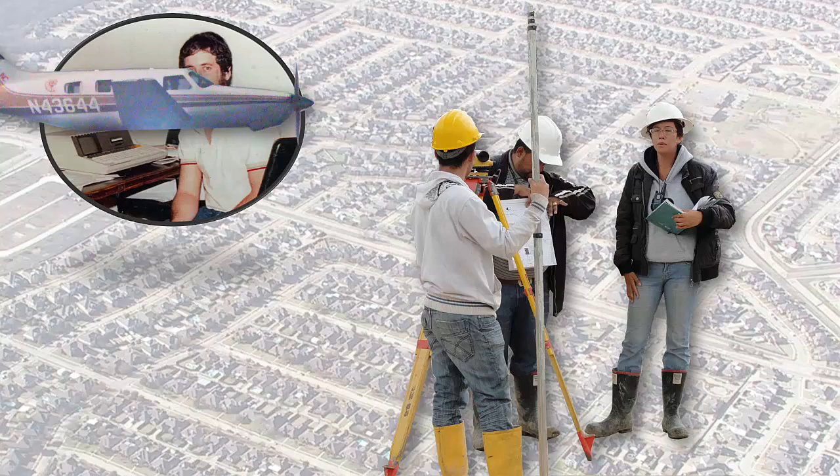Since the late 1970s, we developed software for the civil engineering and land development industry responsible for new growth and redevelopment. As we flew around the nation selling and servicing thousands of consulting firms, we could witness the sprawling subdivisions which were designed by CAD and our technology.

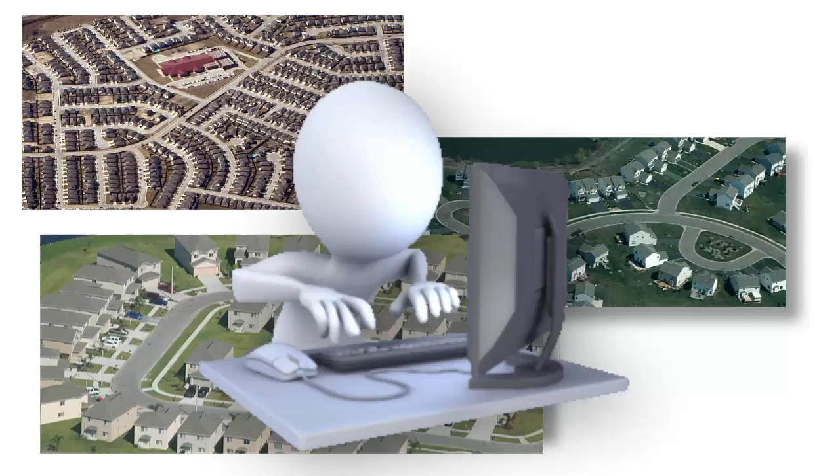It became obvious that a disturbing trend was happening. The pattern of development had gotten worse, not better, because of the repetitive, mindless software functions that replaced careful thought required for time-consuming, manual drafting of a neighborhood design. What would have taken weeks or months could now be done in just a few minutes.

These subdivisions were not disposable products, but unsustainable projects that would negatively affect the economics and living standards for a massive number of people for possibly centuries.

Over a quarter century ago, we formed a spin-off think tank to use the technology we pioneered to discover ways to solve problems of growth without sacrificing the values in space.

Experimentation led to our first discovery we coined coving, which separated the rigid relationship between home front and curb and instead developed a meandering space in the front yard where each home was set to create a curved pattern different than the alignment of the street.

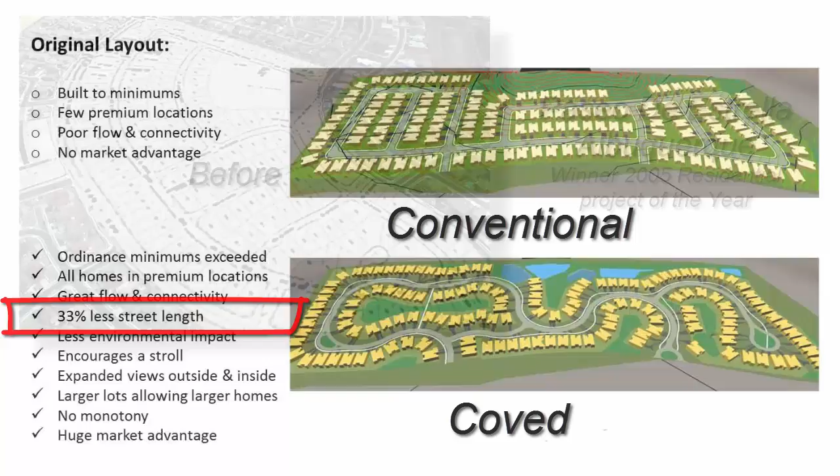By stretching the front setback line and developing flowing street patterns, we could significantly reduce the length of a street by a demonstrated average of 33% without a density loss using the very same regulatory minimums of standard suburban design.

Instead of walking to a park 5 or 10 minutes away, the street took on a park-like setting, enhancing curb appeal and related home values, as well as significantly increasing average lot size.

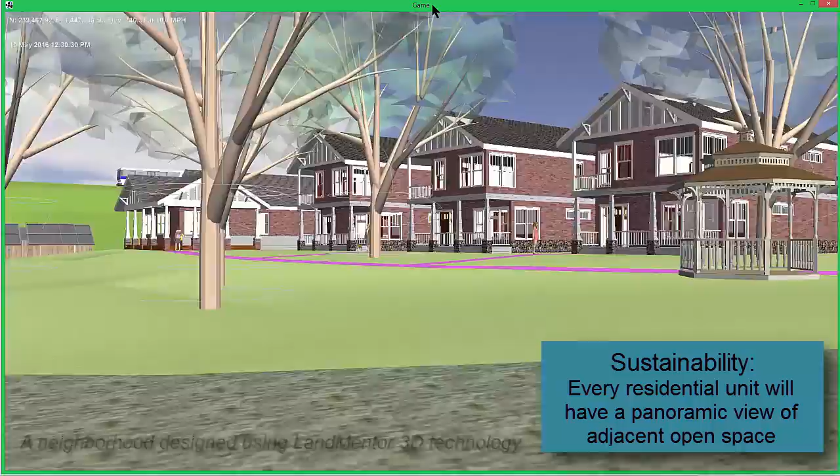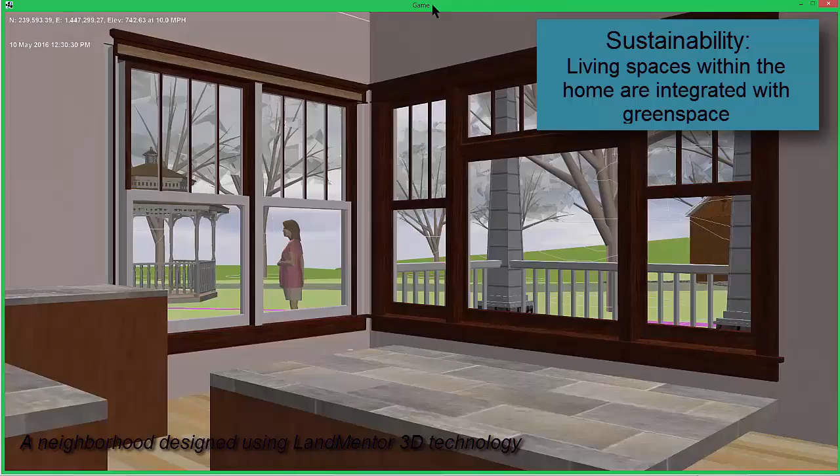By the late 1990s, we introduced the Bay Home, which was the first merging of architecture and planning, where living spaces within the home blended with open spaces around it by creating panoramic views in a village-like setting.

Unlike coving, where homes are set as an art form, Bay homes are carefully staggered to provide a panoramic view and intended as a more viable alternative to townhomes, twin homes, and the rigid new urbanist patterns.

We then looked at the zoning patterns. The transitional patterns common to the suburbs place the highest density and cheapest products along arterial streets and other bad locations, resulting in lower overall value.

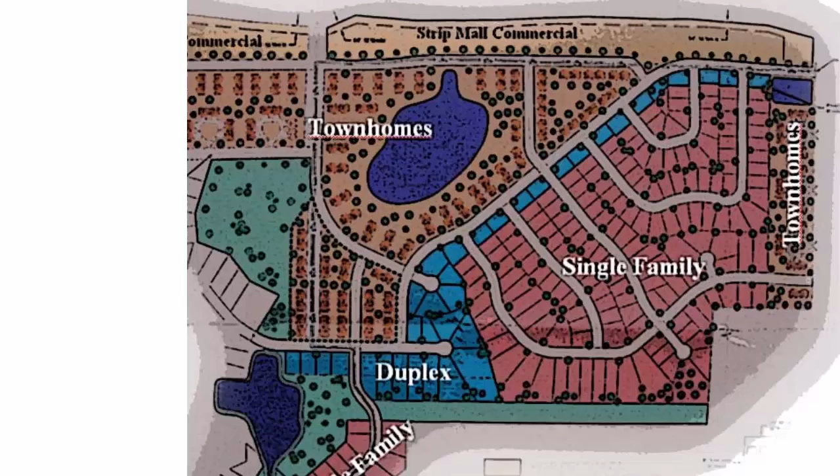Somehow placing a cheap product up front and the most population in the worst places seemed normal. We began to reverse this tradition by placing better products in the perimeters and place everyone, regardless of social strata, in better locations. We coined this new land use relationship CND, or Connective Neighborhood Design.

We also standardized on wider, meandering walks set in easements as they extend beyond the right-of-way. This attention to geometric detail would not just beautify any neighborhood, but has significant safety advantages when pedestrians intermix with vehicular traffic.

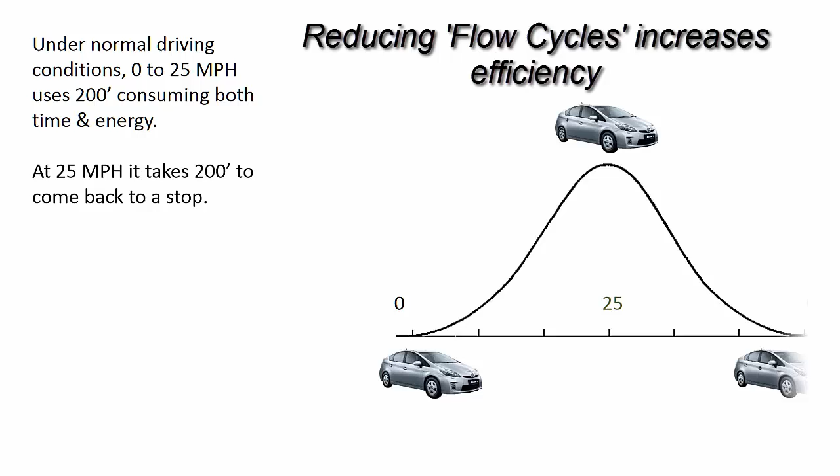As we continued research in how vehicular and pedestrian systems could be improved, we developed a science in neighborhood street patterns that minimize the number of accelerate, stop situations, or flow cycles to reduce both time and energy in transit. For pedestrians, we developed a systematic approach to design, the main trails being the first step in a process to assure all growth was truly walkable.

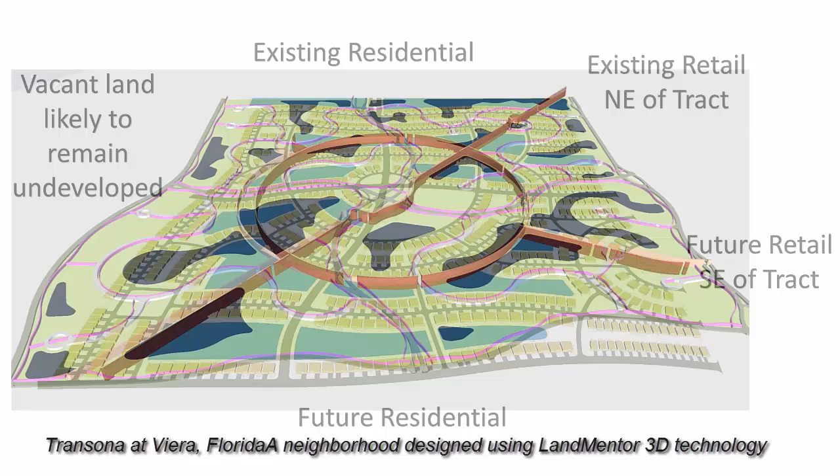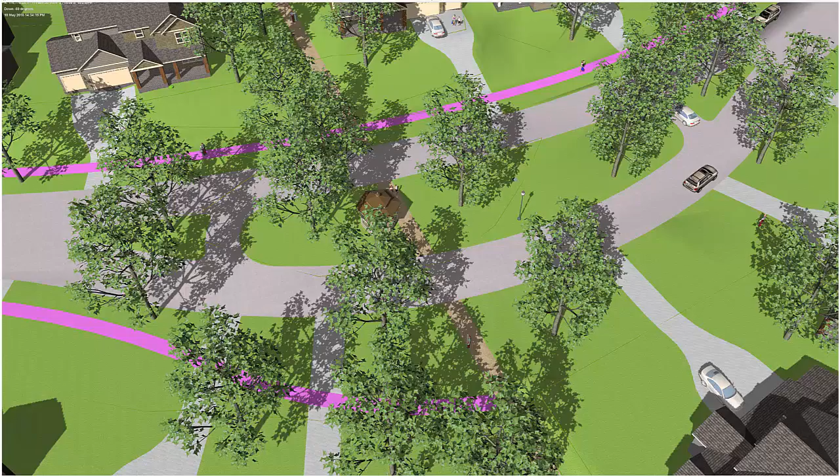As conflicts increased between pedestrians and vehicles, new innovations in design were created to enhance vehicular flow while simultaneously increasing pedestrian safety. Our diffusers are a far better solution for pedestrians than intrusive and potentially dangerous traffic circles and roundabouts. Diffusers have an additional benefit as creating unique entrances and senses of place.

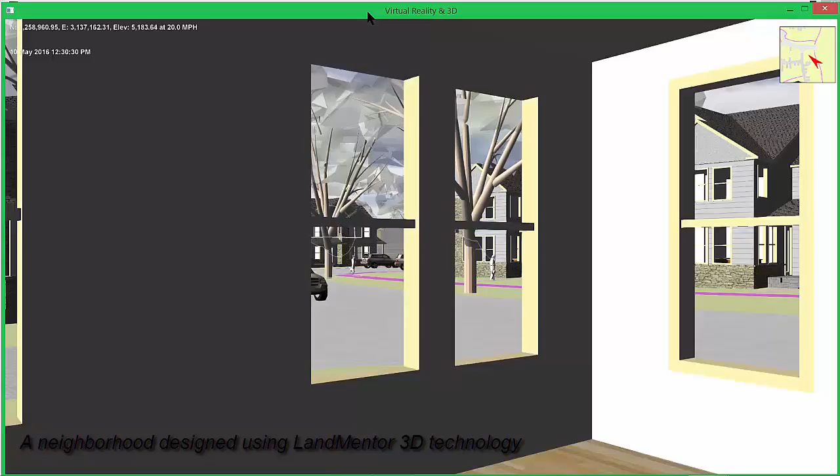We used the proven experiences of merging architecture and planning with the Bay homes and began developing new designs where every home, single family and attached, at all income levels would have the significant advantages.

More recently, by merging architecture and coving patterns, we enhanced the efficiency, living standards, and value of single-family and duplex units on platted lots using a method we call architectural shaping.

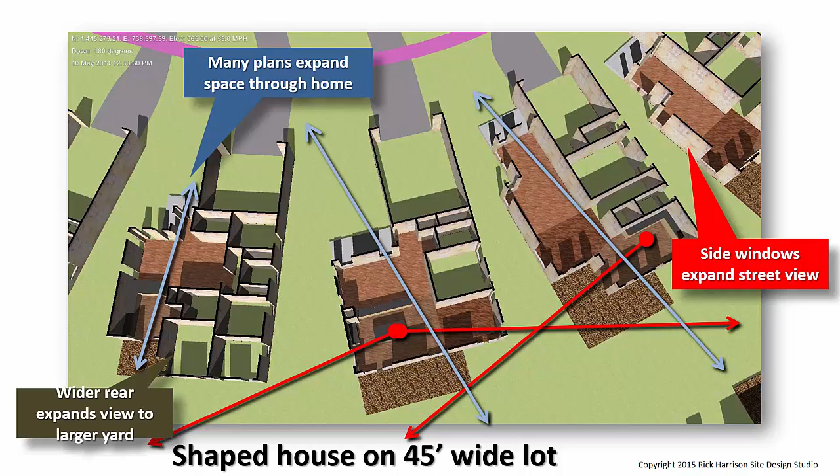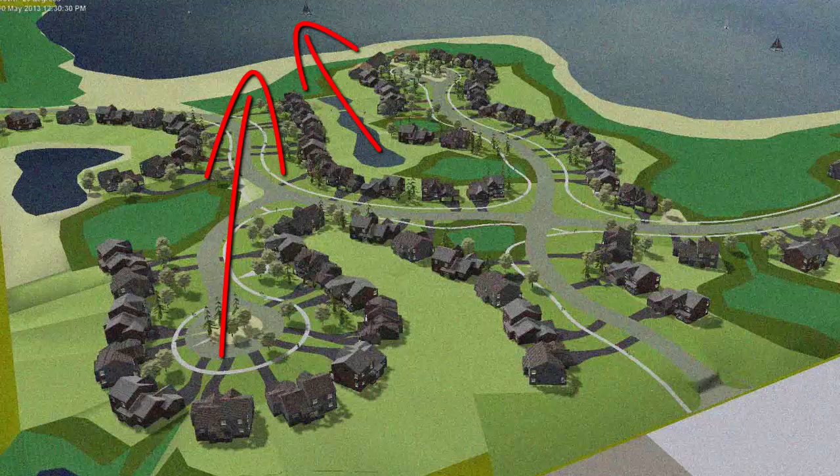To increase premium views, we routinely pull away from site amenities, called pullback. What this does is double or triple the number of premium locations compared to conventional subdividing.

The current regulatory systems in place are seriously flawed, either encouraging most minimal development or making regulatory demands too restrictive and complex, so that land developments become a paint by numbers, preventing the masterpieces.

The research we have done in this area will lead to a new generation of city regulations that encourage and reward better submittals without being cumbersome and overly complex.

All of these discoveries were in conjunction with developing new educational systems and new technologies that will extend beyond our doors to every city, consultant, and school worldwide.

We believe that within a decade, we can disrupt the entire land development and building industry with a new age of solutions that will bring design, attention to detail, and thought back into the growth of our world.